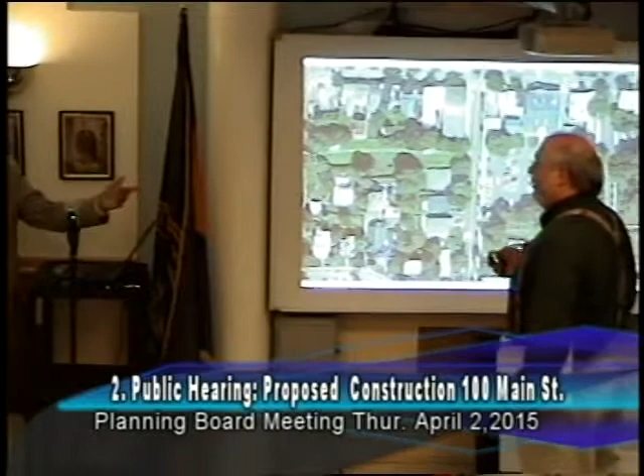Just for memory, this is where we started, with the low-pitched roof on the front. We had parking underneath, two stories, and a low-pitched roof with no usable attic space. People felt this looked wrong, though it's actually very similar to the roof on the front building and the other buildings.

We went to the larger pitch with dormers in response to a request to make it a bit more interesting. This is how we evolved it out.

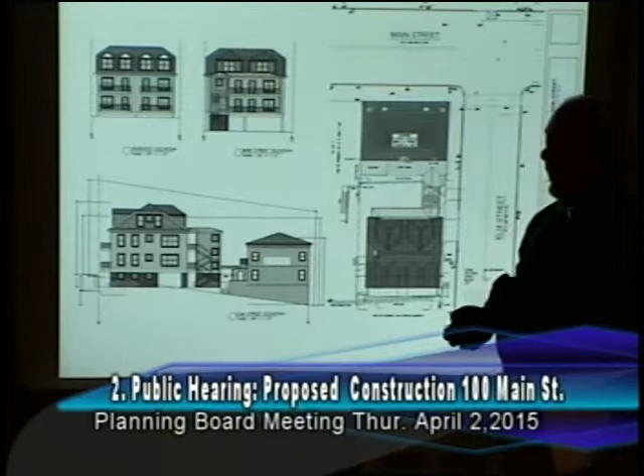I think you want to be careful, since you have the power to say you like this better, not to just ask how do we make this as compliant with the code as possible. Under 352E, you have the ability to modify that because you think it's in the interest of good planning. You could say you prefer the feeling that this breaks the scale down, and you don't want to see it all unified into one structure. But that's a decision you guys will make, and it won't be tonight.

These were just follow-ups to that. Now, what we've done here is a different site plan than before. We've moved this building further away from the aqueduct, so we have 10 feet of separation to the aqueduct. We have not enclosed the parking.

If we wanted 100% compliance with code, we would build a wall in front of the aqueduct's retaining wall, which we do not recommend doing, and cover that, at which point we'd be fully compliant with the positioning of the parking. That wall could be 9 feet high, fully enclosing the cars beneath it.

What we got to with 6668 was the idea that we would locate the parking adjacent to the aqueduct but move the building back, and that's how that project was approved. When we went to the Architectural Review Board, they insisted that we enclose the parking, so that's what was eventually done.

So the parking, we've increased the distance and moved the building over. We have 10 feet from the property line to the parking spaces. Just to clarify where the aqueduct is—right here, along this line.

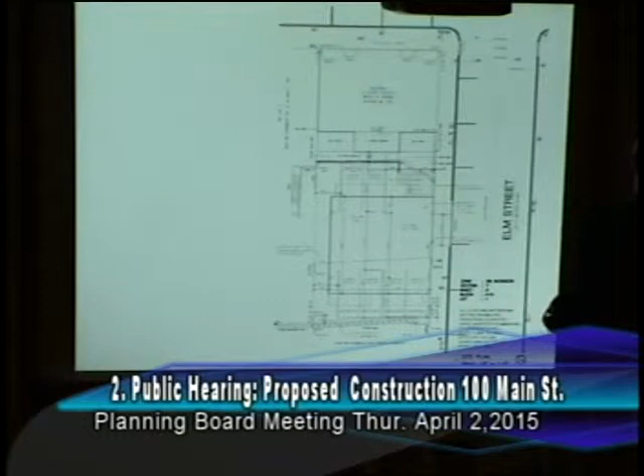We could still have a courtyard area here and a courtyard area back behind to make the connection across, so you'd have a conditioned space connecting the buildings. You'd be able to walk from one building to the other without going outside.

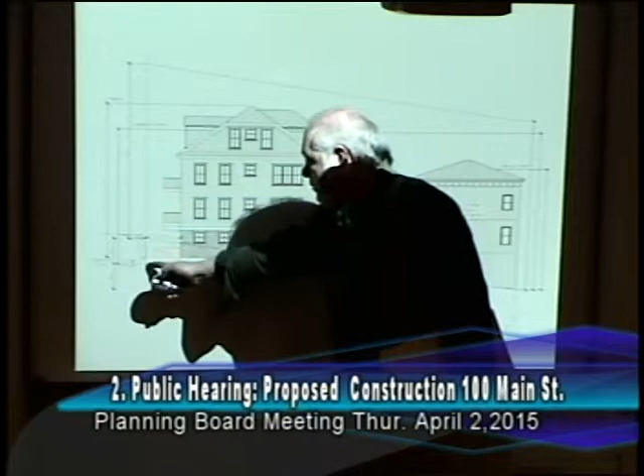With that change, here's the aqueduct wall, here's where you'd see the parking, this is the parking level, the first floor and second floor, this is the attic space. When we get to the SketchUp, we can show you that without the attic space being habitable, which makes a significant difference in the height. Although this is the 50-foot line, in fact here we're still not exceeding 50 feet. So the numbers on this all work, though I understand numbers aren't what's going to drive anyone's opinion.

But that doesn't mean people don't feel it's too tall. So there's a way to make this less by eliminating the attic, and you still get 4 good units. Here, this was where we originally proposed putting the 4th floor on the front building, so you'd have the retail, and 1, 2, and 3 floors of residential. That would make it comply, if they're separate structures, and it would eliminate one of the variances that would be necessary.

We would still need a variance for the interpretation. I don't agree with it, but I'll respect it. The interpretation is that you can only have one primary building, and if you have 2 buildings on the property, there's a primary and an accessory, and you cannot have residential units in an accessory structure. So the only way to have two buildings on a site... although we have several conditions in the downtown that have that, it was also pointed out to me yesterday that those were built 100 years ago, so they weren't under our current zoning. I wasn't on the board then.

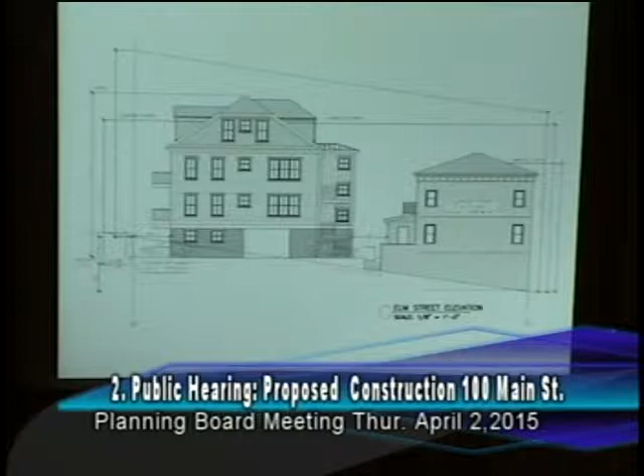So that takes us up through all this stuff. This goes through all the photos. I don't know if you need any of the photos.

Let me ask you, whether the top floor on the back building you propose, is that habitable space, an attic residence? Yes, it'll be a residence. It would be the second floor of the units, and the two units on the second floor would have a staircase with two rooms under the attic in the dormers, so the bedroom areas would be there. So you'd have nicer units, but you don't need that to have those be units. You'd still have an 860 square foot unit without using that attic.

That attic would lower it probably 10 feet if you take that out? It's not quite that, it probably lowers it about 6 feet. But it's more than just the 6 feet, it's not just the number. It completely changes the way the roof looks, it's a much flatter roof. You don't have the dormers, you're not bringing that energy to it.

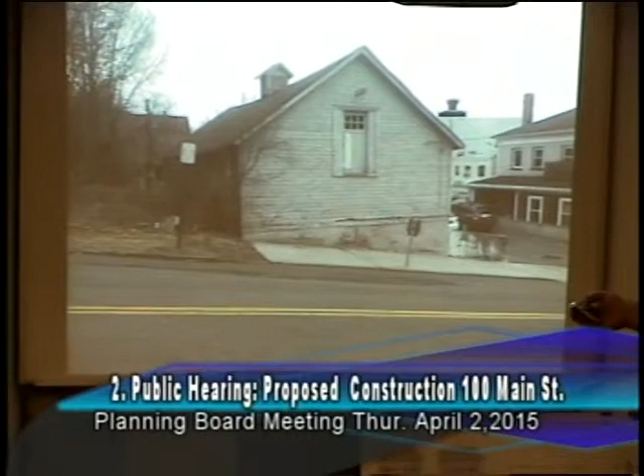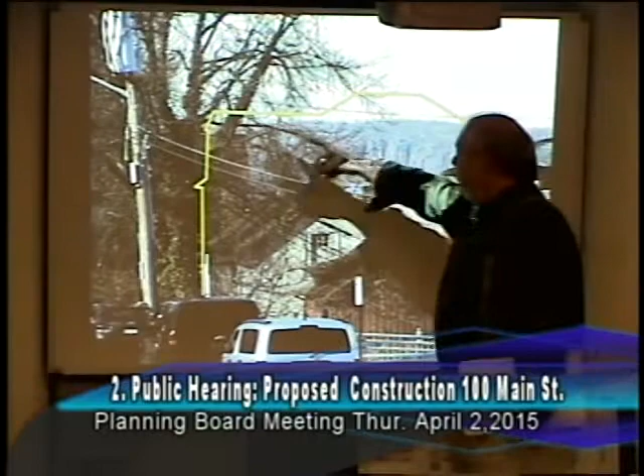So it's a different look, but I think it'll be better to look at that in the SketchUp. Steve was nice enough to help provide a kind of frame for what he was projecting, because views are going to come up in this, with the natural resources and scenic review. So we took this and showed how the building we're proposing actually fits within that frame. Steve's fairly accurate with what the height would be. What you're doing is you'd be losing this view. The only challenge with this photo is that it has to be a telephoto lens, and you're standing pretty high unless you're over on Oak Street, but it's a great view.

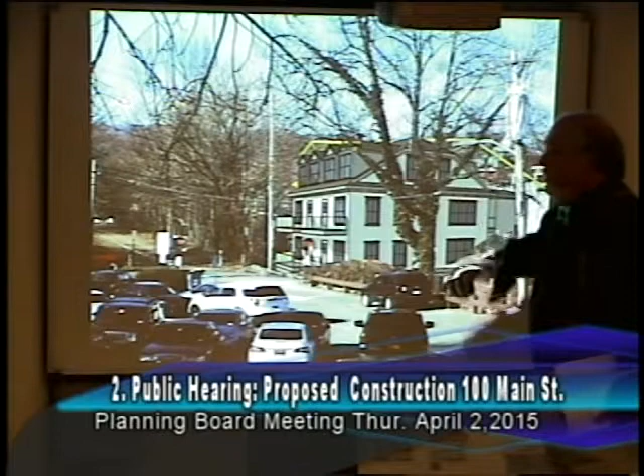We did the same with this one, where that fits in. We don't go as far over as it was projected, but I don't think that really makes a difference. And these are, of course, with this floor. If you imagine not having the attic and the dormers, and that the height is here, it's much more consistent with the two-family houses up the street on Elm Street. But I don't know, is there any interest here in going into any of the photos?

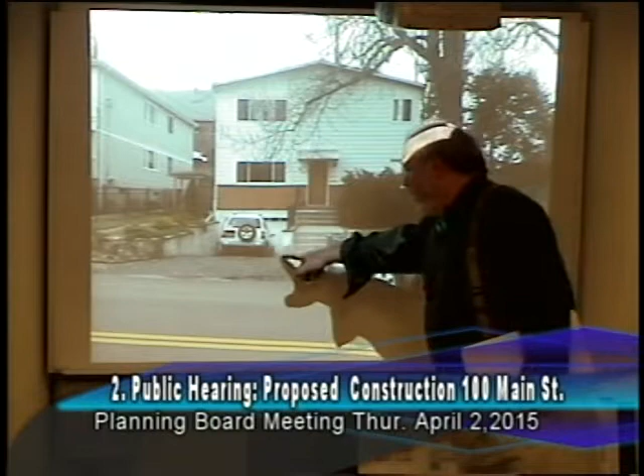You guys know this village better than I do. I believe we do. Yeah, these are the houses up the street, 2 stories. They're not quite as tall because you get the ramp down, but the difference in height is how much of a difference that is from getting the ramp down.

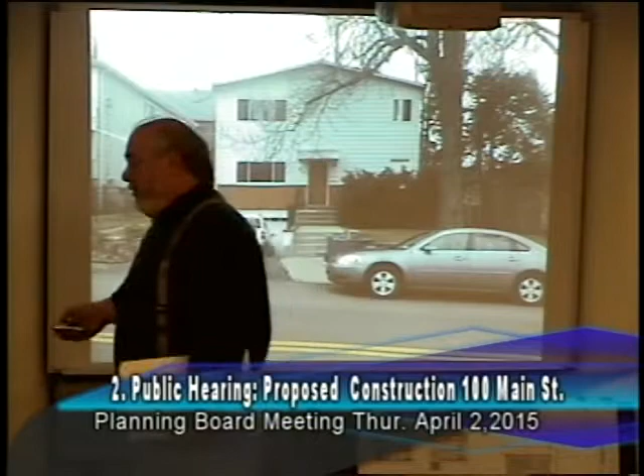So these are probably 2 to 3 feet shorter than what that is, but again, fully compliant, and these are not in the DB zoning district.

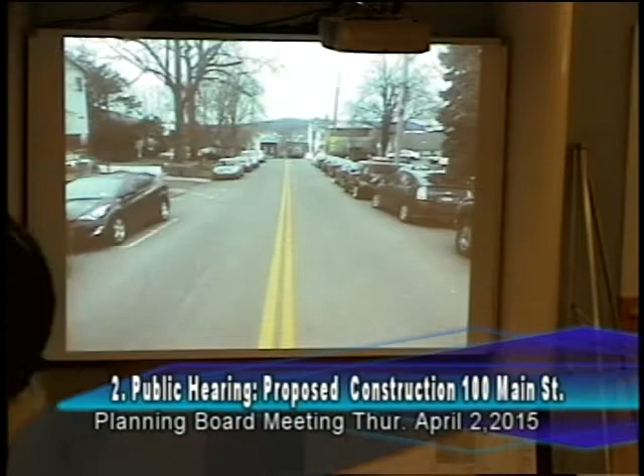Hey, how many spaces are proposed in these plans? Parking, yeah, we propose 6. And how many would be needed? If we have the plan that we have now with the 2 in the front and 4 in the back, 6 units. Okay, and what if you add a unit?

Not including street parking. There's no requirement for the stores for their parking. We're required 1 parking space per residential unit. So if we have 6 units, we need 6 parking spaces. We've provided 6 parking spaces.

These are all - isn't it one per additional bedroom? No, that's only if you're not a mixed-use building. If you're a mixed-use building, it's 1 space. I'll defer to when Brian comes back. Unless - are you up on that? So you are mixed-use, but the back building's not. So you have 6 total residential units and plus. 6 parking spots. So let me look at it, hold on.

Mixed-use dwelling requires one space per dwelling unit, that would be your 6. And you're interpreting you don't need to add anything for the retail space? No, that's existing space, and the code specifically stipulates that existing retail space does not require parking. At this point we wouldn't be touching the front building.

Gotcha. What size, how many bedrooms in those back units? They would all be set up as either a small 2 or a generous 1. What's the difference in a small 2 and a generous 1? If I've got 20 feet of width to the unit, that's called generous - I can put 2 bedrooms side by side on the back. So you can get a 2-bedroom unit to fit in that.

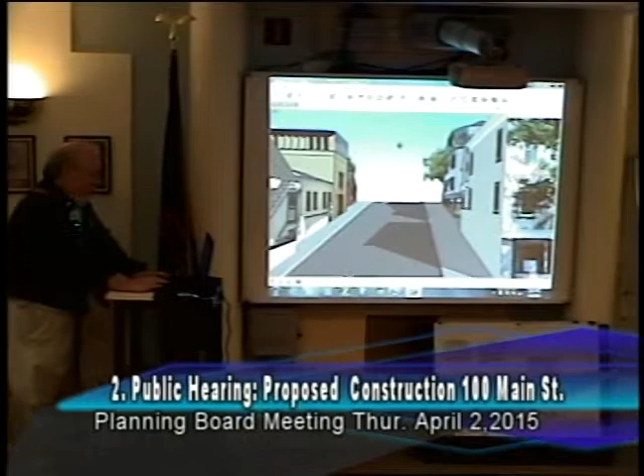Okay, this is the scheme with the attic space, which I'm just going to kind of spin you around quickly on it. This basically shows how the space feels between the buildings, where you've got the ability to see through - you don't feel like it's a solid wall coming across, which I think has some positives to it. But that's an opinion, and other people could say they feel differently.

Just so you're aware of it, we're showing shadows on all of these. This is June at 4 p.m., so this is the solstice in June. I've also got the December and the equinox, so we can compare what those are. I did 4 o'clock for all of them because that was the greatest shadow that we put on the street. Okay, so if we look at this, and if I figure out how to move this thing down.

Okay, let me show this - it's going to change position. This is the lower pitched roof. If we did this, so we did not have the attic space above, you can tell that it takes a lot of height out of the appearance of the building. That attic space with the dormers definitely makes it look like a taller building.

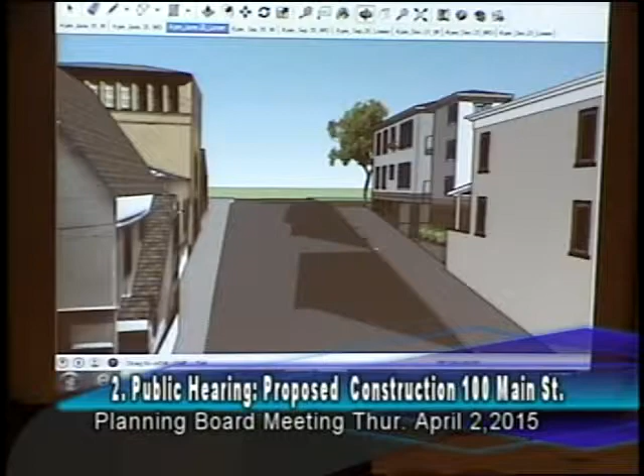I think it's a nicer building, but again, that's my opinion. You don't have to have that to make it work, and it's not a matter of the board giving anything special because that is a totally legal space to have. In fact, it doesn't have to be an attic space - it could simply be a third floor on the building.

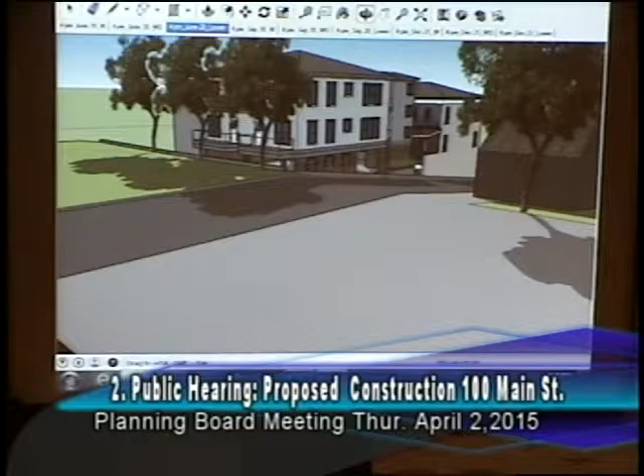So this is looking at that one. I don't know if there's any value to it, but I might as well show it. This is without having anything there other than the barn structure. The reason that might be worth looking at is if I'm down on the aqueduct level, I can see that the barn structure itself right now makes any view towards the river unviable.

The main difference between what's there now and if we build something is we're going to affect more the sky view - the height will block more of the sky, and there are two views that'll actually be directly affected to a small degree. It's not dramatic, but it's still affected.

One is from the Historical Society, when you're standing on the porch and looking. Right now you see the aqueduct, the river, and the Palisades with this building down below you. You would now see that roof line coming up, and it clips a small view between two buildings across the street - you would lose that view. We'll document that for the next meeting so you can see exactly what it is.

The other one that gets affected the same way is Oak Street. If you're going up Oak Street, by the time you get towards the back of the parking lot, with the rise you've got a very nice view there. Right now you don't notice this building at all, but with this built, you would see it as part of the panoramic view. It doesn't block your view of the Palisades or the Hudson, but it just becomes visible - it becomes a component in the streetscape, so to speak.

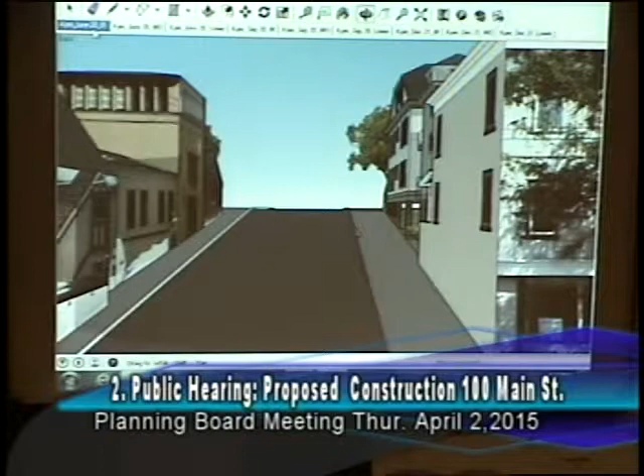It doesn't come up as high if you're doing the lower roof, so that's probably the biggest difference you'd get in how that works. As I noted, in June at that time of day, by around 4 o'clock you're getting shadows on that side of the street, but you're also getting continuous shadow on the west side of Main Street at that point, and I think we can all handle that pretty well.

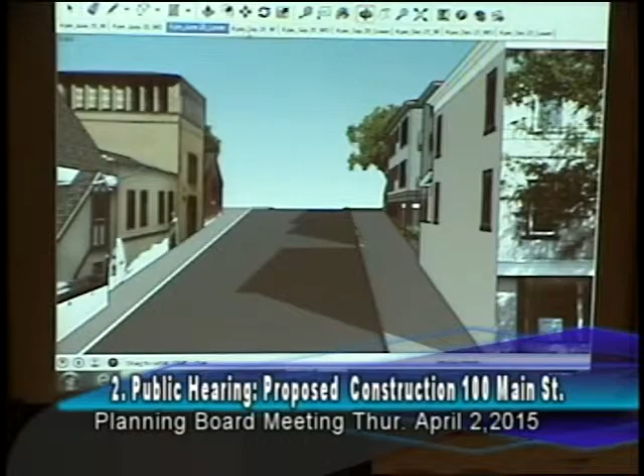I don't know, any other questions? Have you looked at bringing the eave down to the next floor so that it appears as an attic space? That starts to suggest a different roof form that I'm not going to touch - the way I'd do that is make it a mansard.

And right now, I think we're being mansarded out. So I think it would be actually a very good way to handle it, but I didn't feel comfortable proposing getting another one. You've already got two. Actually, though, we eliminated the mansard and everything on Main Street at 66, 68, but several people are reacting to the mansard roof.

Well, why does that necessitate a mansard? It doesn't necessitate a mansard, but if you look at that context, like all the buildings across the street, up at Zion, what they've done is they've put a mansard specifically on top of the building for that reason, so you get a usable top floor.

And you haven't lost, if I moved the existing attic down, I could do 2 units at that point, but I don't think this works with 2 units. I think we started with 12 and we're down to 6. 12 units originally. Yeah.

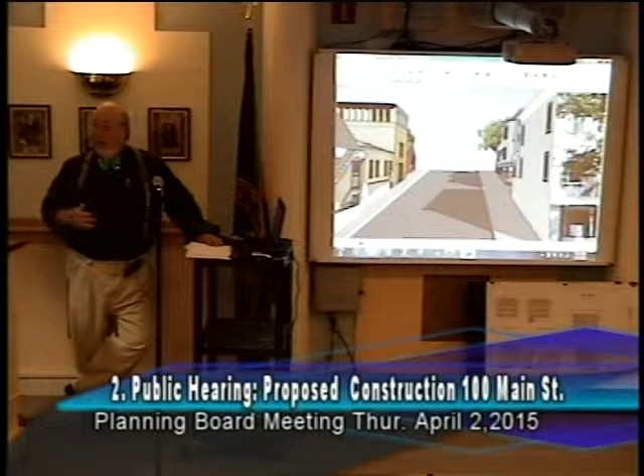So we've cut the density of the project in half, although maybe I'm the only one in the wilderness saying this, I think the goal should be getting more residential units in the downtown, but I'm not gonna fight that. I've cut it from 12 to 6.

And I think my understanding when you came last time was not that we told you to make it more dynamic. I thought we were saying make it, either utilize the barn, make something of the barn. If you can utilize it, take something from the barn.

Which reminds me, what I think we need, and I'd like to do it on the 18th, so it's before the 20th, I think we need a site walk. I think we should go out and we should look at it, and I don't want to be saying what the barn is or isn't or anything else. I'd like everybody else to have a firsthand experience of it and decide what they would like.

I made an offer at the last meeting, which I stand by, I'm willing to do it. But so far, no one has expressed an interest in that, so.

There's been a lot of discussion written about the barn, of what the age of it is, what the status of it is, what the condition of it is. I'm hearing many, many, many, many stories.

I started a really awkward argument between two people who are 83 years old on the street. We got into a conversation, and one of the people, both of whom grew up in Dobbs, have lived in Dobbs their whole life, one is basically saying, I don't remember anything ever changing on that in the 40s, and the other person's saying, don't you remember when they took that building down, they used the materials, they rebuilt, they built the new thing when they opened that boat place. So one person remembers it, the other person doesn't.

I'm still trying to find what it is. I've heard both. Looking at the construction of the building and having had some experience, having renovated actually a number of barns and moved barns and converted them into residential use, I would not be trying to do that with this structure. There's nothing intrinsic about it that says, wow, this would be great.

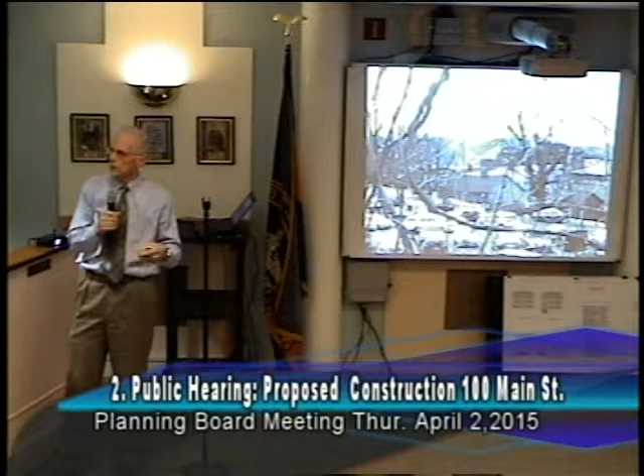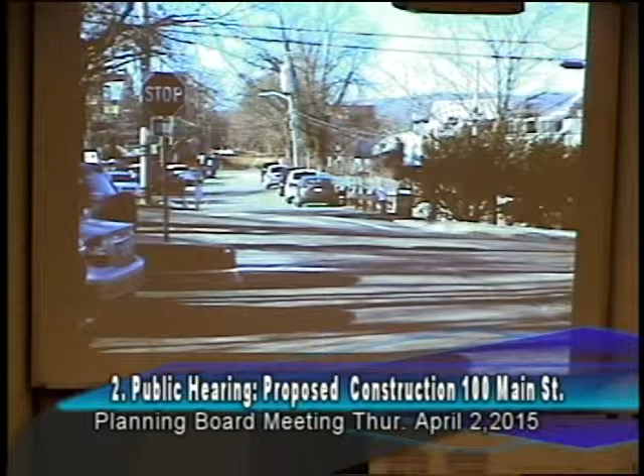So Patty's right, I was walking up Oak Street, trying to stay on public ways, which is what we did for the LWRP view platforms, looking at views from public spaces and views of the Palisades and the river. We are a ferry-related place. This is from Oak Street, and this one's from further up in the parking lot behind Sam's. I think the view issue has to be thought about in continuity.

Movies are frames of things that build up. Views in the village and along the aqueduct, each individual view may not be the Ansel Adams postcard view, but they add up, because your eyes and your visual memory are smarter than you are. They register these views you pick up as you walk down the aqueduct.

You're seeing these little slivers, and they add up. So it could be death by a thousand cuts if we start treating each one by a standard that says it's either the greatest view ever, or it's something that's in play.

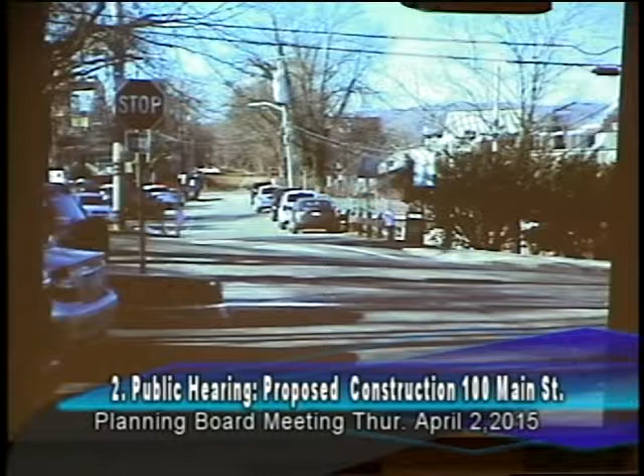So there's a view here. You can start to see the Palisades view developing. And as you walk into the parking lot, at eye level, you can see it registering.

This is what happens when you take a picture of a fantastic view in the landscape, like a canyon, and then get home and you don't see the canyon anymore. You saw it when you were there because your eye projects you into views. So the telephoto isn't lying, it's creating something you experienced yourself. Your brain brings you into those views. So this view is actually there, I think, even though it's a telephoto lens.

I don't mean to interrupt, but I'm interrupting. I should have prefaced that this is not a public hearing, so even though we're making comments, it's really directed to us for our own thinking, and to the applicant. From the point of view of a record for a public hearing, that will come later when it's called. People making presentations, this is just a preliminary forum, it doesn't go on forever. This is a very short PowerPoint. This is short? This is helpful too, I think. Patty, you didn't have to do that. I respect Steve, he knows that.

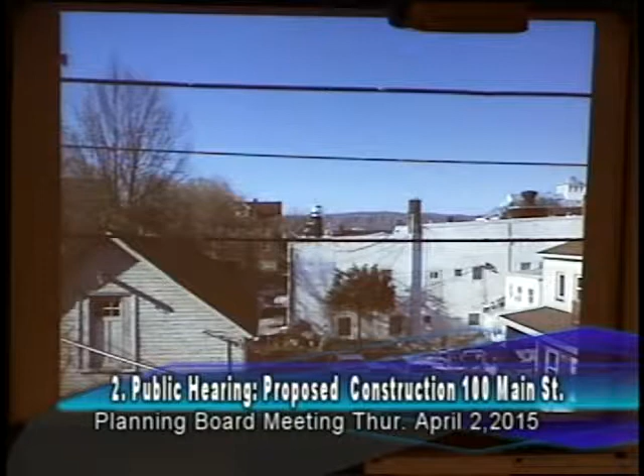So there is a view that registers, sorry if I'm in your way here, a view that registers from that location that is gone. There's a view from Oak Street that is blocked, a significant view of the river. And then I can't avoid this, the view from my top floor, which we invested in and enjoy, particularly that little glimpse of the Palisades.

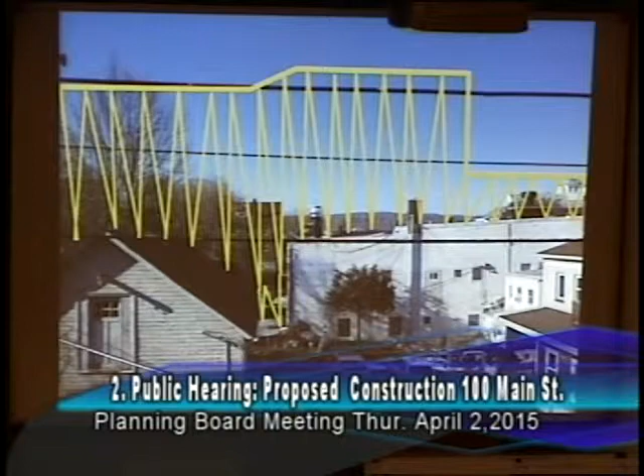So the winter sun angle thing is, I think it's also about, that's a slippery place. We've watched a bunch of people fall down, not on our sidewalk, on that sidewalk across the street. We're pretty careful, I mean maybe somebody did when I wasn't looking. Well, we get very little snow now, so we don't have a problem. Exactly, now with global warming we're really in good shape.

But there is, obviously, shadow analyses are certainly important in site planning. And that street, as a slope street, the winter shade, this is November 21st through January 21st at midday, so this is the highest sun angle. Other sun angles are lower in that time of year.

And this is my projection of the height of the most recent application that I actually had my hands on. So I'm going to switch to historicity and just quickly move through this.

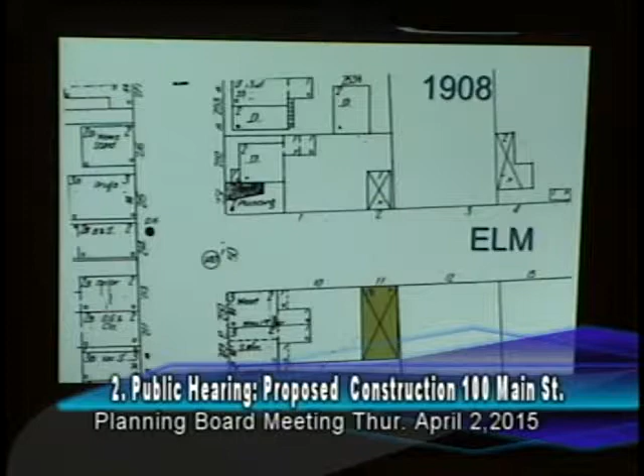This is a 1908 map where pretty much what indicates the shape of the barn that's there. I believe that the lumber is pre-1902 lumber, just dimensionally. Doesn't look like it was reused, but again, all my sensibilities and intuitions are that this is from the 1880s, 1890s.

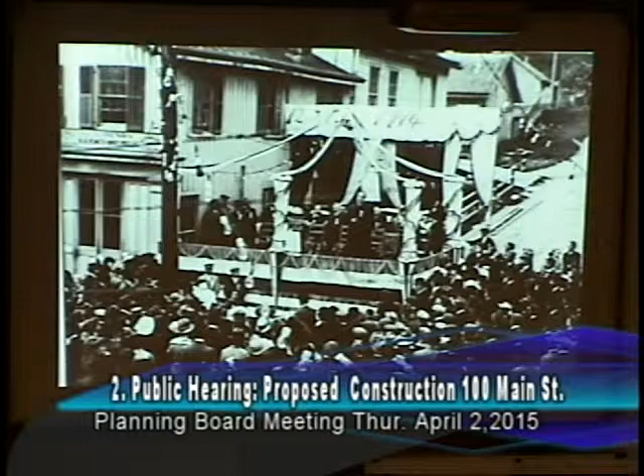And my collection of buildings, I think, is resonant of that era. And I think there are other companions that keep that memory, that collection of memories, alive. And I think that's a great thing. I think it's really an important thing.

So what I see is, in the vision plan, John Shapiro and the Land Use Committee said really the entire downtown area should be a historic district because there are so many 100-plus-year-old buildings. And there would obviously be non-contributing and contributing buildings, and some judicious way of allowing and promoting change. At the core of that is our National Historic Landmark that threads its way from Croton Dam to the High Bridge and connects hundreds of historic sites along the way, including a whole bunch in Dobbs Ferry.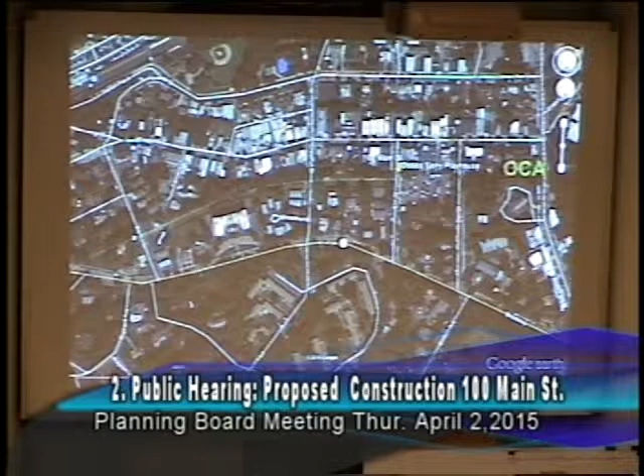So you've got the old Croton Aqueduct, which connects - I've left off some things on this - the Zion Church, South Pres, the post office, which is a National Register building. It's not late 19th century, but the Mead House, our building at 100 Main Street, 12 Chestnut, the Gagliardi House, which is this wonderful kind of oddball thing right on the aqueduct, the Keeper's Barn. I left off Summerfield Methodist Church and the parsonage, which are really also from that era, and the Keeper's Barn, which is another wood frame relative from the last half of the 19th century, the Keeper's House, and the Carriage House on Hatch Terrace.

And so I think that there's this argument about collective memory and the memory that remains in artifacts that's not easily dismissed. Again, more of this obviously on the public record in a public hearing, but that's my brief.

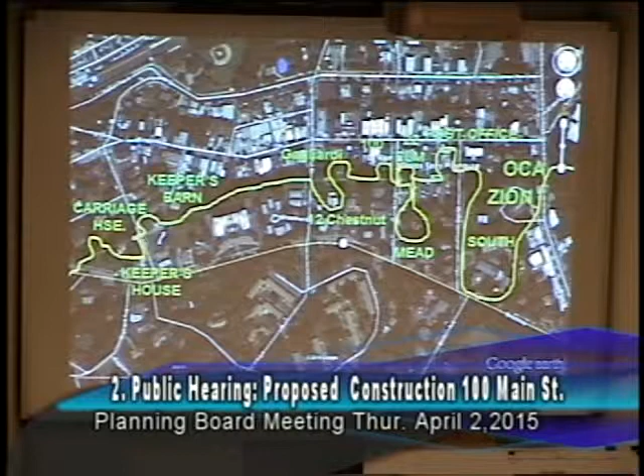I think there are some zoning-related issues that need to be addressed and a set of other qualitative ones. I think that a lot of what's said, and this is a lot of the material that came in discussion on the board that I've been involved in for years, is that it may not be a landmark issue of a federal or state level, but there are many things in the village of local historic significance. And in some manner the board in the past, and should be in the future, should be concerned about these, if we can maintain them.

The issue, of course, is a series of who owns it, what the economics are, and the whole issue about the barn - you can talk about that till we're blue in the face, because whether the nail is this way or that way, and whether it was this year or that year, was it dressed, was it finished lumber - these are issues that can be discussed by somebody of expert status.

Okay, keeping in mind this is not a public hearing, just advice, suggestions. Anyone else wish to speak? Please, if you can state your name and address.

Good evening, Annalisa Corrales, 12 Livingston Avenue. I recognize this is not a public hearing. I do have some suggestions for the applicant. First of all, to listen very carefully to Mr. Tilley's presentation, but also, sorry, okay.

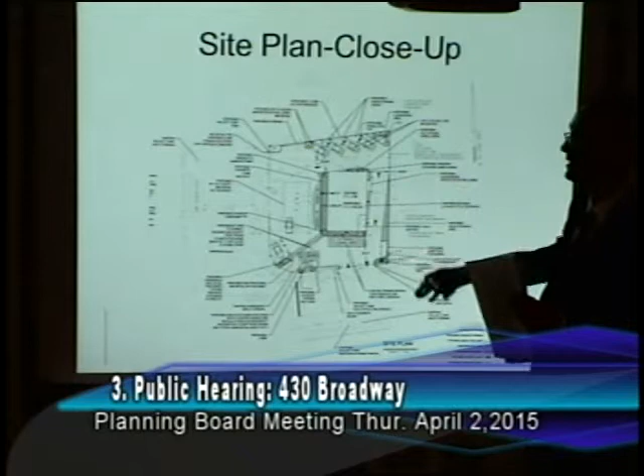Certainly, and the next slide is a blow-up of the site plan. As I understood it and was relayed to me earlier today, the issue was that the parking is proposed along the rear property line, and there's a 10-foot setback requirement. The site layout doesn't really allow us to create parking in any other location, except immediately adjacent to the building, which on the prior proposal from over a year ago, the planning board and the board of trustees were not in favor of. So this is really the only location where we could propose parking. I don't know if there's any comments or questions or discussion. Well, does that comply, Brian?

Well, this is the issue we were just speaking about. There would need to be a 10-foot setback under chapter 300. That could be waived if it meets your thought process of how you want this site to work.

I think there's an issue you need to speak on. Dr. Grealy's here and can discuss whether he believes this parking layout is better than any other layout, but you can consider that and waive it if you deem appropriate. If not, then we need a variance. The abutting property here is the diner property.

Yes, you need to have a 10-foot setback on that side. The 10-foot would be from here, is that right? Yes sir, and it's approximately 3 feet the way it's set up at the moment, so there'd be about a 7-foot requirement for a variance. And I think there was a discussion at some point of having the parking against the building.

That's correct, along the back edge. No, that was rejected by the Board of Trustees. But even on the north side of the building, that didn't work either—you wouldn't be able to get enough spaces there, and it would create issues if you were going to do angled spaces in that direction, since you'd want to send the traffic flow around, which we don't want. Based on the last round of comments, we changed the traffic flow to be counterclockwise.

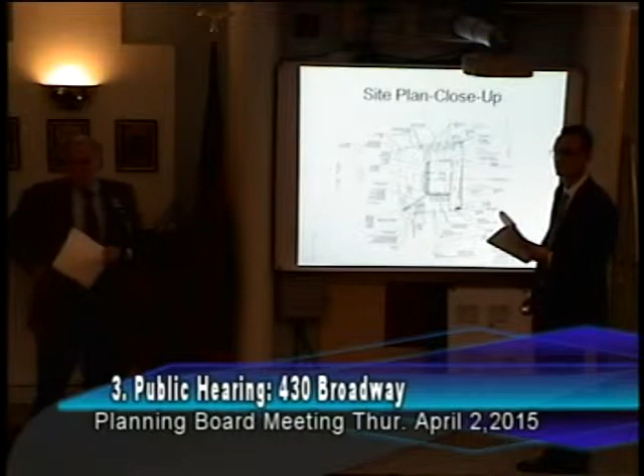Quick question: is the car parking space on the right 10 feet from that side yard, or that property line? This one? Yes, the last one. So is the variance only on one side or both? The code actually reads that you need to be 10 feet from any rear or side yard setback, so you have a double variance requirement, as well as all of these.

But is that 10 feet already? Do you have 10 feet there, to this property line? Yes. No, probably not. No, they don't.

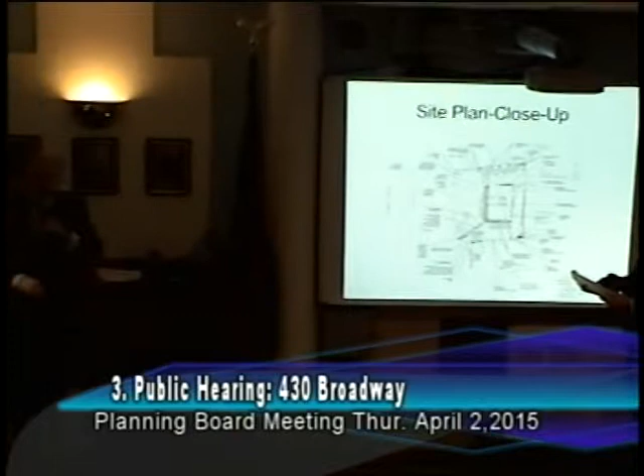Okay Phil, you're on. Good evening, Mr. Chairman, members of the board, members of the public. Philip Grealy with Maser Consulting. We were asked to review the traffic study as well as to provide comments on the parking and circulation. This application was originally submitted, and there were modifications made based on the previous reviews.

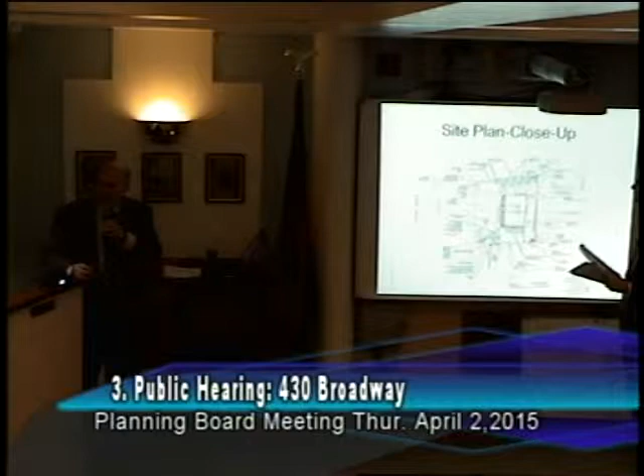The most recent round of reviews on this particular project included 3 memos or letters from our office. The first one dated back in December of 2014. In that letter we focused on 3 items. One was, at the time, there was no traffic study done. Number 2 was some general comments relative to the site plan in terms of circulation, which the applicant has just talked about, making it one-way counterclockwise, which the plan now has. Number 3 was our concerns relative to traffic flow on Ashford Avenue due to the proximity to the traffic signal.

The applicant made a resubmission and basically made the modifications in terms of the circulation. They indicated that they needed to have two-way access, both entry and exit, on Ashford Avenue. However, we were concerned that by having traffic exit here, because traffic queues up from the light across the driveway, it could be problematic. The applicant has stated in their submission that they would be willing to live with a condition of approval that if there was a problem, they would modify it to become right turn entry only.

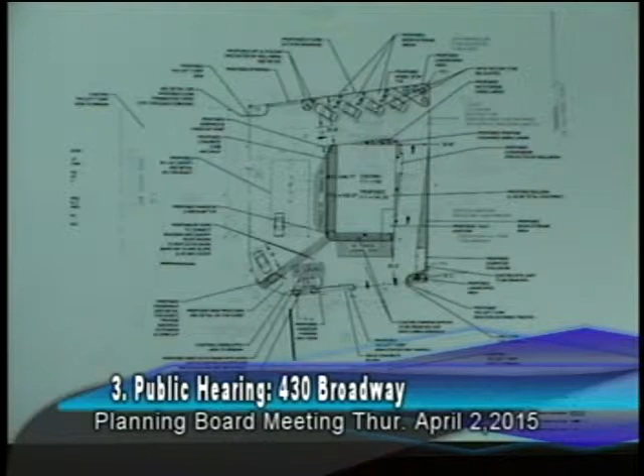I think it would be good to get that input early, but if the applicant feels he wants to leave that as a condition of approval, that's their prerogative. We're in agreement with the village engineer that input early is better than late.

I have a quick question. I remember at one point, pertaining to a gas station, there was a requirement for 150 feet for the driveway from the intersection. Does this satisfy that dimension? This doesn't satisfy that dimension, but it's an existing driveway, and that's one of the reasons we were suggesting to make it entry only, to get that distance, because you don't want the influence close to the signal.

My next question goes to planning: if the change of use, originally a gas station, now it's a change of use, does that grandfathering still carry over? They've had a convenience store, so I don't think we'd call it a change of use. You're saying it's tied in with the gas station? It's been there for quite a time, so I think the gas station use is grandfathered, and there's been a convenience store there for years and years.

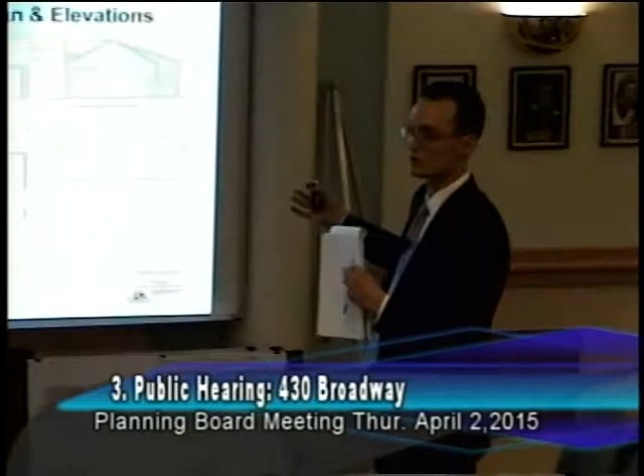So these are proposed floor plan and the elevations of the new structure, the renovated structure, with the removed bay at the northerly end.

This is similar to where the applicant left off with the Board of Architectural Review on the last go-around, minus the bay.

And this is one rendering with a flat roof option on the canopy. What is the thickness of that? What is the height? 36 inches, 3 feet. It does look like more than that. In order to fit a fire suppression system in there, I think you need a certain width to it.

And then a different option is with a mansard roof, which I heard earlier conversation on, no more mansard, so we can just delete that slide if that's not something we've gotten input on from the Board of Architectural Review yet. On the last application, this is kind of where we left off at the board before the application ultimately got denied at the Board of Trustees.

Is this a very important item? The canopy? Yes, you're fighting pretty hard for this. It's a fairly standard modern amenity on most redone stations nowadays. It's done on highways, I see it all over the place.

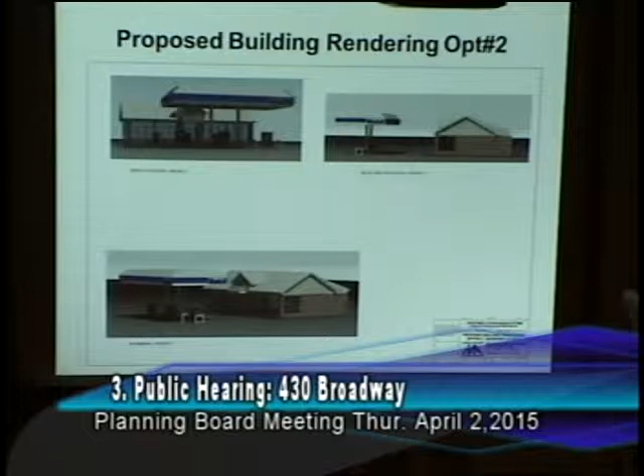Okay. Yeah. Well, I just had a thought before the meeting, because I drove by it the other day, and I asked Marcus to use Google Earth and go to Google Street View in Irvington. So this is one of the corners you could argue is a 100% corner in Irvington. It's that gas station right there. And they have a canopy, but it is quite thin. When I drove by it last time, I noticed it's actually quite thin.

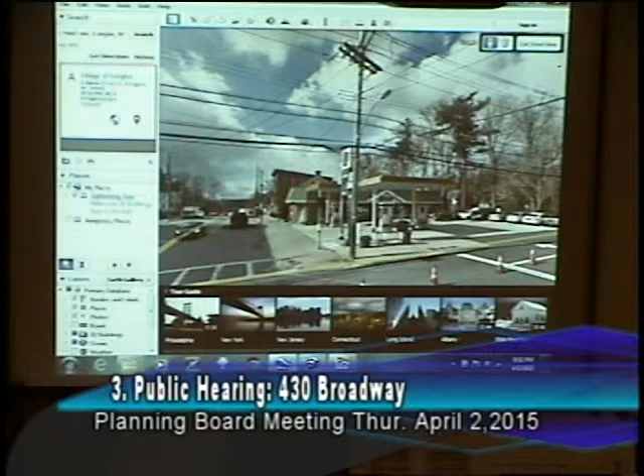Like a couple feet? I don't know if it's even 2 feet. And I guess, personally, well the mansard roof, of course, if it's a gas station it should look like a gas station, but the mansard roof, or any kind of roof, I think is ridiculous in my opinion, but the Architecture and Historic Review Board will tell you what they think. But if there is going to be a canopy, there's got to be a way to do one that is thin.

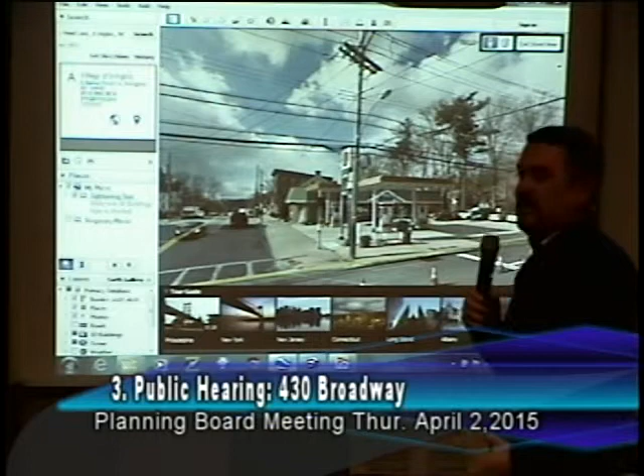Scott Parker, with the owner. If you look at this picture, you can see right here, there's a little red thing. That's the fire suppression. The fire suppression canisters have to be upright, and they go on top of the canopy. The site we're talking about is at kind of the bottom of the hill. If you're coming from the other side of Ashford, that would be very visible on top of the canopy.

Is this why you're making it thicker, making it higher? Yeah, I mean it hides everything. Typically that's why that depth is there. Structurally, obviously we can get down this far, but then we've got to figure out how to hide things up there that you don't want to see.

So if there were a couple boxes on top that enclosed the fire suppression, could that work? We've done that. Certainly, instead of having 3 feet, it could be 1.5 feet.

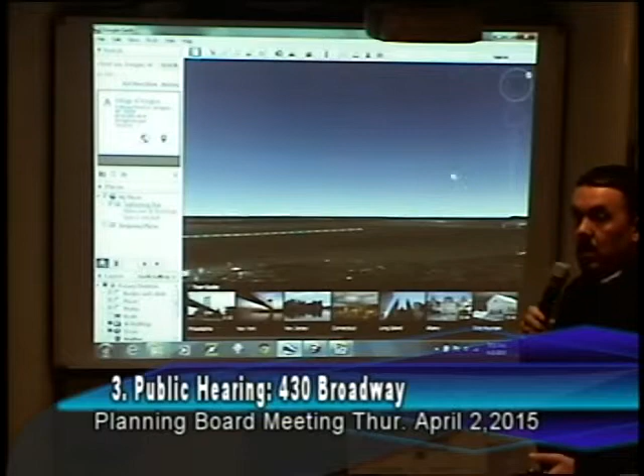If you go, which way am I going? Oh, I'm sorry. When you come down Ashford, isn't it blocked by Walgreens? True, yeah, but no, the other side. He's talking about when you come from Broadway. This side, south is this, and you're on this higher canopy road.

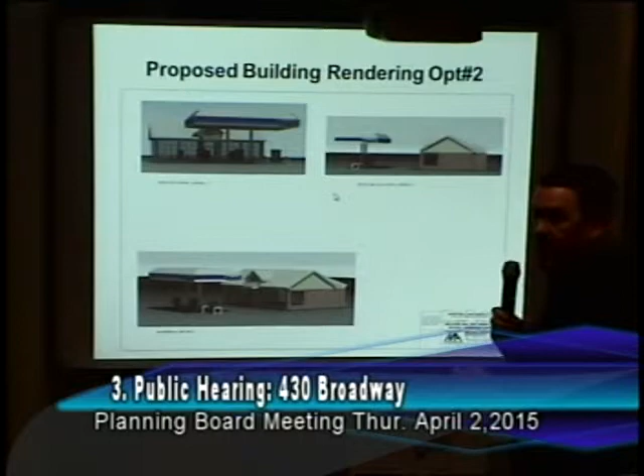Is it lit? No, we're not proposing to light it, no lighting, so that'll be very clear. No lighting. This is an example of one that we recently built, just so you can see that.

But that one you said earlier could be 3 feet. That is 3 feet, plus a roof. But you could make it narrower if there was a way to enclose those tanks.

Okay, I thought we had one more picture that showed a view from above. We took a picture from up here on this hill, and you can't see the canisters on there, the fire suppression canisters. But you do see a 3 foot thick one. And again, would it bother you to make it 1.5 feet if you didn't mind seeing the cans? No, but you put an enclosure around them, a box.

It's fine. I think it'd be good to get a better idea of what we actually see in terms of these canisters, because I know the gas station, the Getty, caddy corner, right? They don't have a canopy, they have a fire suppression system, so they're not hiding it at all. Right, and I guess you see those little nozzle things. Sure, and the canisters are actually mounted on the thing. To me, it looks like it's just part of the gas station equipment. So I guess I don't understand, I feel like the whole fire suppression thing here has become overblown and overcovered.

I can't figure out why... on those little stems, those are fire suppression nozzles. Right, but the thickness - the whole business of hiding the fire suppression system, I don't quite get.

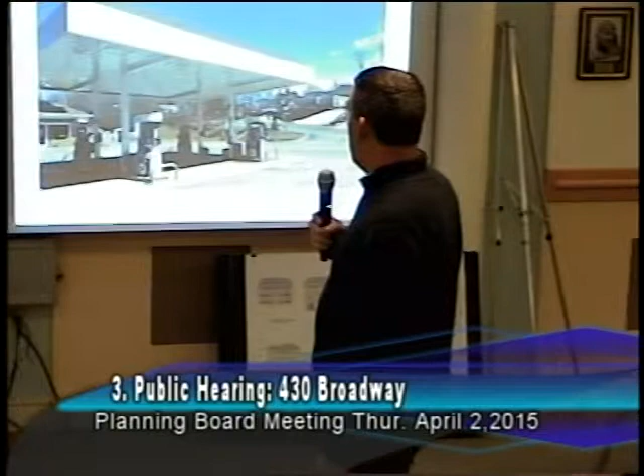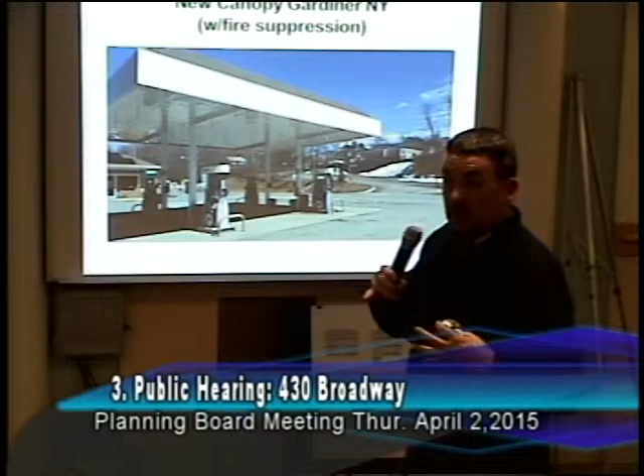Let me ask a question - those stems are far away from the supporting poles of this canopy. I'm wondering if there's some new code, or could you put all the canisters on the poles? We could hang the canisters on the poles, same way it's done with the red cylinders. So there's no law change requiring that - instead of having it hidden up top, you'd just see it here at 5 feet. That's all.

Paint them with stripes - they'll think it's a barber shop. You might be onto something about the barbershop. I don't go to one.

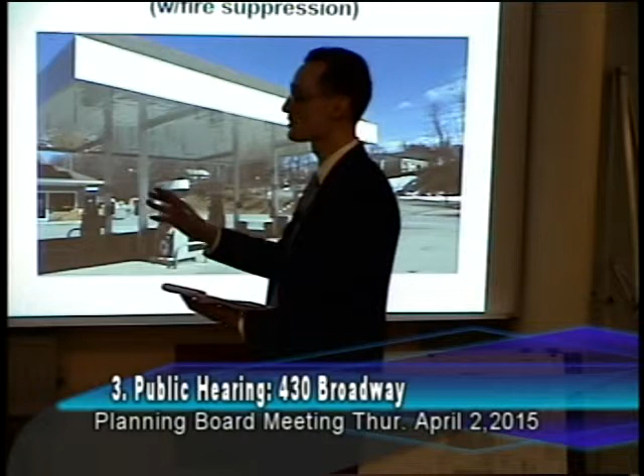We also look forward to those two letters, one from State DOT and one from County DPW. Do you have to take comments today? Yeah, if there's any public comment - today is a public hearing.

Anybody wish to speak? Anybody ride a bicycle? What do you care about gas for?

Can you pull up the drawing of the site plan again? Could you use the microphone, state your name and address, and state who you are? Rob Barron, I'm from 10 Cricket Lane.

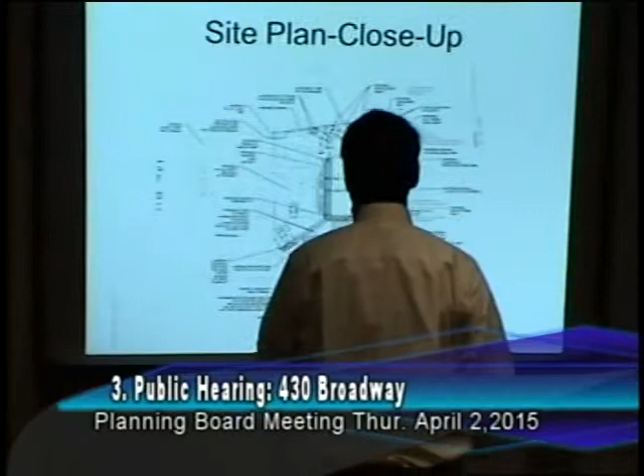My big concern is - I have a couple of concerns. We always talk about protecting the aqueduct as an important mode of transportation for the village, but this is actually one of the most important sidewalks in the village. Everybody knows people are going to school, going to town. It's also a significant transfer point for our bus system - we're trying to get Mercy College students to use transit. They're getting off the number 6 bus, transferring to the number 1 bus going north, then going to Mercy College.

So the big concern I have is that these driveways, with now double the number of cars, are going to create significant hazards on this crosswalk to people walking, including our kids going to and from school - this is sort of peak time.

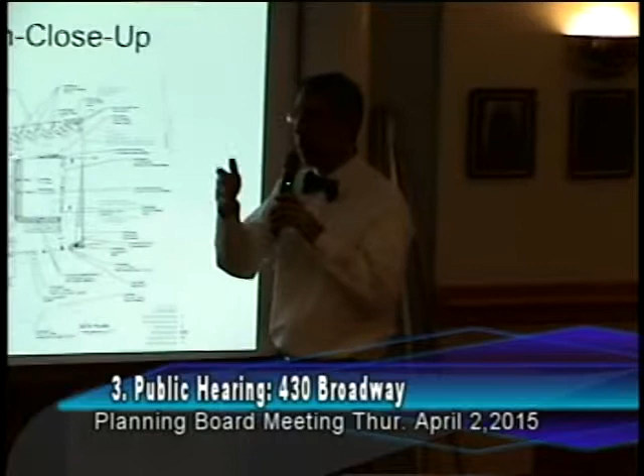I get the Dunkin' Donuts thing - people are like rabid for this coffee, I kid you not. I've been at other spots in town, over near Scaramella's, and you can't believe the cars going in and out of there. So that's my big concern - here we are trying to create a vision plan calling for more, trying to encourage more pedestrian use.

As a bicyclist - I'm sorry, I'm saying it - as a bicyclist, when I make this turn and come along here, having the two driveways to navigate, where cars, even though they're not supposed to make a left turn, are looking left, looking right.

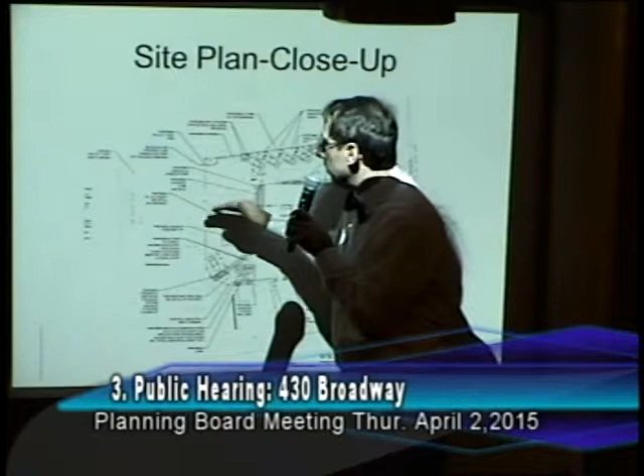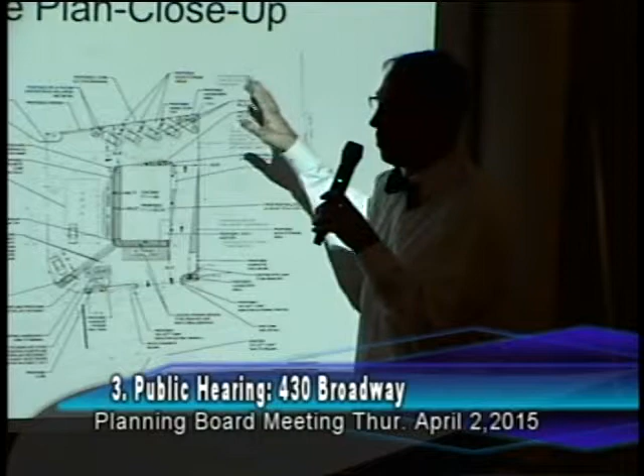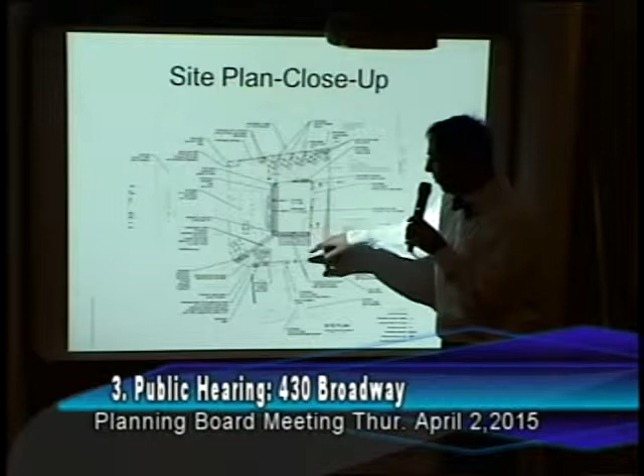It wasn't that offensive, Darius.

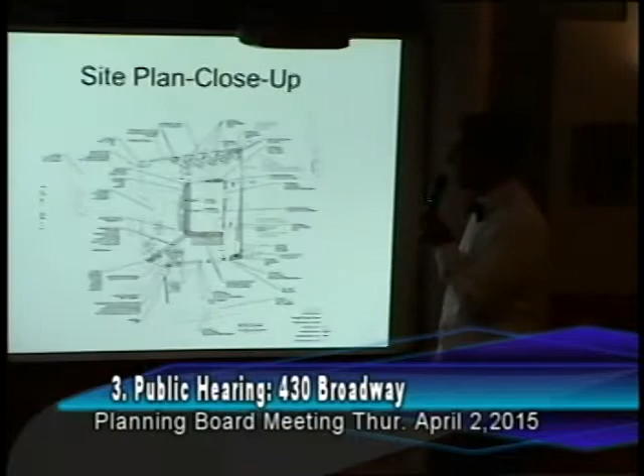I'd also like to see this crosswalk here be a raised crosswalk, so that when pedestrians are crossing, there's something to delineate it other than paint on the ground. I think that's it. I think this is a really scary thing for Dobbs Ferry from a pedestrian standpoint. Thank you.

Thank you. If you go into the past TV programs that showed this meeting, you may have heard some of these concerns before. Anyone else to speak tonight?

Please, you're going to become a regular, I see. You have to redo your name and address, make sure it's the same one. Yeah, no kidding. Annalisa Corrales, 12 Livingston Avenue.

Thanks for letting me speak again. I just have a question. Have they studied the traffic patterns of a Dunkin' Donuts? They talked about 20 to 30 cars at peak times, which sounds like a small number, but what will it be at peak times if there's a Dunkin' Donuts there? Similar to the person who spoke before me, I have major concerns, because it draws huge crowds. With that being the pathway to the middle school and the high school, so many kids crossing through, I have the exact same concerns. I'd love to see more data on the actual volume of traffic. It's already very taxed, very busy.

Excellent question. Phil, could you answer that please? Again, Philip Grealy. The applicant used the published data for this type of use, Dunkin' Donuts, Starbucks type traffic generation, in making the estimates. So when we talk about the increase in volume, it's based on the coffee shop Dunkin' Donuts as part of that square footage. The numbers would be less if it was just convenience, however the convenience store today does sell coffee, though I believe it's very limited. So if there was no Dunkin' Donuts but they expanded the convenience store, typically the coffee increases also. The specific study done included the 600 square feet as a standalone generation for the Dunkin' Donuts coffee shop category, based on studies of several of those stores. I think the applicant has addressed that. Otherwise, if it was just convenience store space, those increases would be less. And again, we're talking about peak hours in the morning, those are the types of increases you'd see on top of what's already there. So the answer is yes.

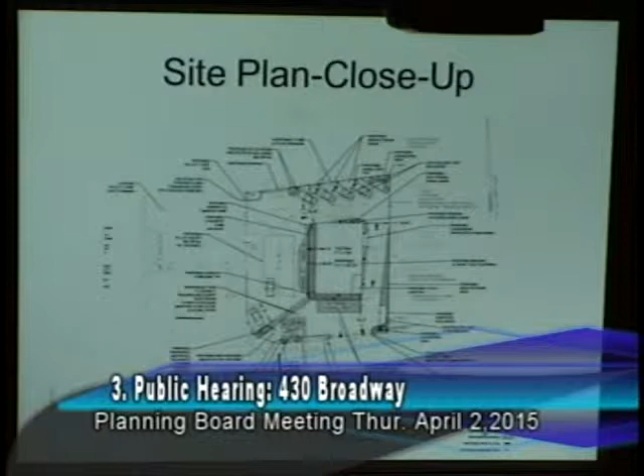The last comment that Mr. Barron had was about a possible raised crosswalk here. I think one other alternative, because I don't know if the applicant can do a raised crosswalk there, would be some sort of stamped concrete as opposed to just striping. The problem with striping is that if it's not maintained... I think that's something that should at least be looked at. I'll ask the applicant to please look into that. That's something that would be very favorably looked upon if there's some way to really identify the sidewalk areas.

Okay, any other questions, comments? If not, the applicant? I didn't see your hand, I'm sorry. You just did it. Oh, I don't have any guilt then, okay.

I would just like to note that Judith Spikes, 5 Brace Terrace - the concerns of cyclists, pedestrians, children, school children going to school, and bus have already been noted. I'd just like to add one other perspective, that of a person patronizing Walgreens, the diner, or the Mobil station. I patronize the diner and Walgreens, and I used to patronize the station before that corner got all crowded up after Walgreens went in. I've also heard, I believe at a board meeting recently, that Phelps Hospital has leased the 2nd story of Walgreens for doctors' offices for a group practice there. I was wondering already where people are going to park - the doctor, the staff, and the patients - because already now, at peak usage times, existing parking is often almost used up.

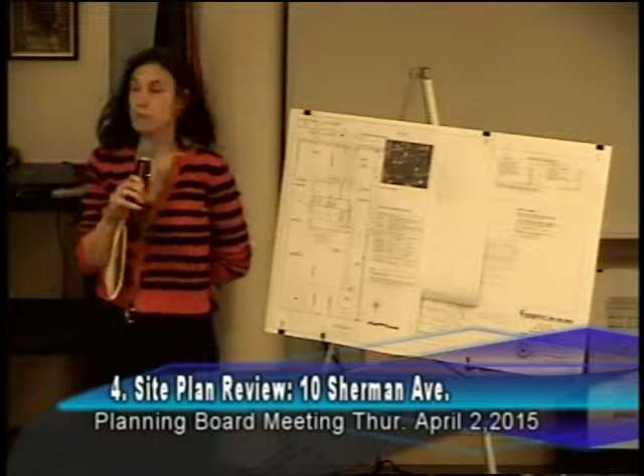Our clients, the Winiarskis, had purchased the property at 16 Sherman Avenue, which we had renovated for them and which they are currently living in. When the property next door, 10 Sherman, went up for sale, they had concerns about what might happen with it. They saw it as an opportunity to protect the investment in their own house, but also make an investment in the community where they've chosen to remain, as they had relocated just around the corner from Seneca Street.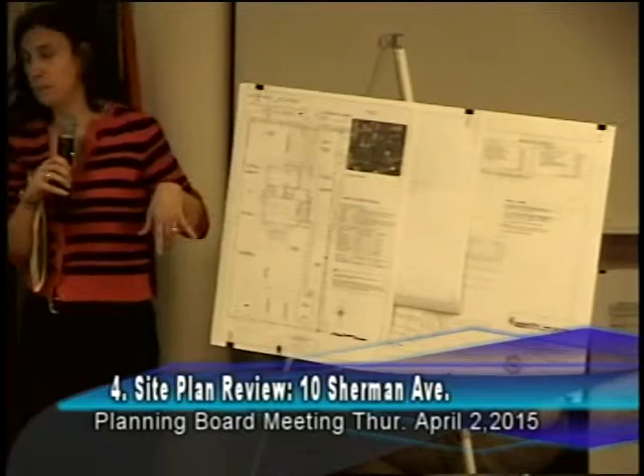So the proposal is to take the existing building down to foundation and rebuild new on the existing footprint. That's what they're estimating is the most economical approach, and it will sit on the existing foundation. We're not increasing the footprint of the existing structure.

You're going to use the same footprint? Ideally, yeah, the same footprint. Hopefully the foundations are adequate to support it. Well, we haven't taken the structure down yet. We're not suggesting that we're going to build a structure that cannot be supported on the foundation.

We don't work on prayer. We're not suggesting that we're going to build a structure that will not be supported on the existing foundation. Prayer is a good thing, though. But what I mean is that we're not going to be increasing the footprint of the existing structure.

If the existing foundation is deemed not adequate, we would pour a new foundation within the limits of the existing building. When they make statements such as 'the existing structure,' who tests to make sure that what we have as a foundation is adequate for the new building? An engineering report would be required to state that the foundation would be sufficient to support the proposed load the new structure would require. And that would be required by your department before you go forward? Yes. Okay, thank you.

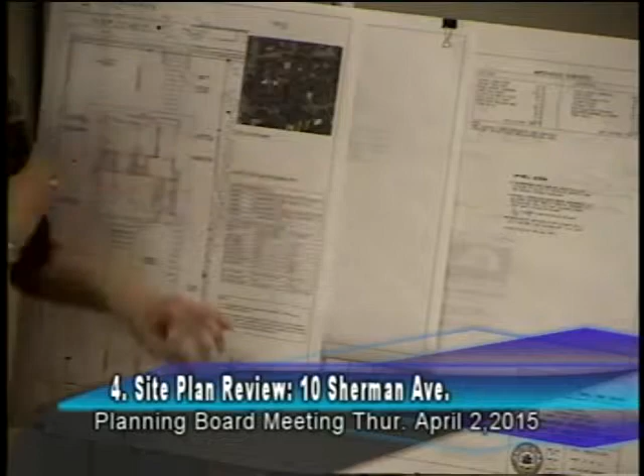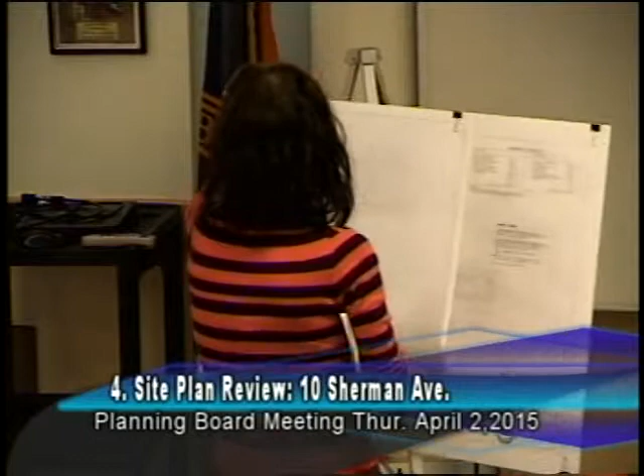So the description on the application for the building permit is a complete interior and exterior renovation. It's not a renovation, it's a reconstruction, from what you just told me. Well, there were discussions about maintaining the existing structure and working within the limits of that framework, and then subsequent discussions with the contractor suggested it might be more practical in economic terms.

To take it down, exactly. The building permit that came to your department says clearly interior, exterior renovation, and what we're hearing now is rebuilding from scratch. Yes, if they remove the building down to the foundation and reconstruct it, there's a new series of requirements, so that may not be an accurate description of what the proposal will be.

Okay, thank you, I'm just reading what it says here. No, I understood. Okay, so what's the proposed rear and side elevation in the new scheme?

Is that building total, is it different from the other one? Yeah, this is the proposed building. Okay, here's the old one. Gotcha, okay, I see it.

Is there anyone here excited about this one? You're interested in the whole story? Are you familiar with this? Totally, totally. So it wouldn't get you too excited if they demolish the existing house, it's an eyesore. You're in favor of it? I am, yes. That doesn't mean I would approve what they want to put up, but honestly it's a very awkward, characterless house. Okay, no, I'm just aside because you're not on the microphone, therefore even though you're talking it doesn't exist. Okay, no, I just wanted to make sure who was in the audience.

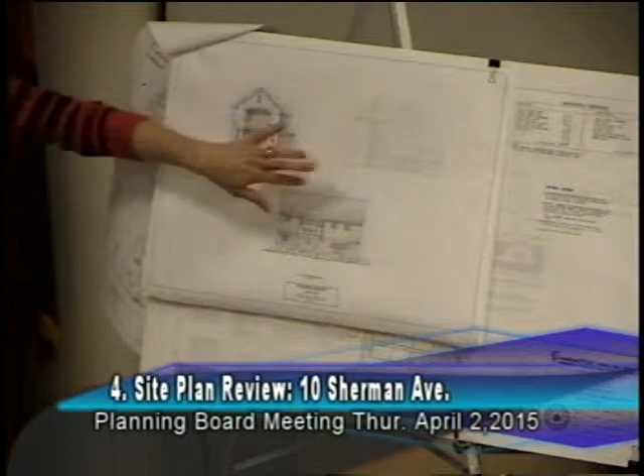Okay, understood. So this is the proposed rear elevation, proposed side elevation. This is 16 Sherman shown in context next to it, so you can get a sense of the scale. What the clients have enlisted us to do is really make it more in keeping with the character of the rest of the neighborhood, while still deferring to the scale and structure of the other houses around it.

Does this go in front of the architectural board? Yes. So you understand that we're talking about, since your foundations are not moving hopefully, your side yards, backyards, all of these have no changes from the original. The only thing changing is the structure itself. And what you're describing now is more into the architectural field, so you're gonna have the same dog and pony show in front of the architectural board. Yes, understood. Are you changing any driveways or anything?

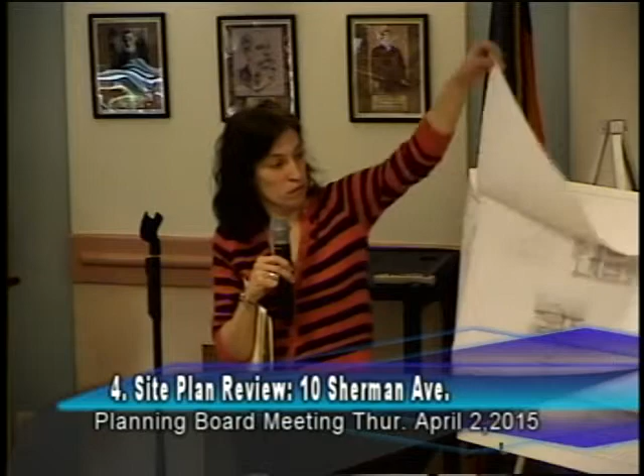There is an existing... let's get this back here. There's a current driveway in the front that goes to what is now the garage, which I mentioned is going to be redone and eliminated to be steps, with paving leading to the new front entrance. There is existing paving in back that was theoretically for a garage that might have existed, which is going to be eliminated. And then there is a curb cut in the back for a future one-story, single-car garage at the back of the property within all the required setbacks.

So the answer is there'll be changes to the driveway? Yes. I was just wondering, because if you're not changing the site, you could consider waiving it subject to all engineering requirements. That's what I'm thinking about.

Your drainage system, there is a storm sewer retention system? Yes, stormwater retention. We've enlisted the services of an engineer. It has to comply, and that has to go through the building department, so you're gonna be seeing all of that. We have already enlisted an engineer, we have it all done. Wonderful, and you have to set yourself up for a session with the Architectural Review Board. Yes, and at that point, I do agree.

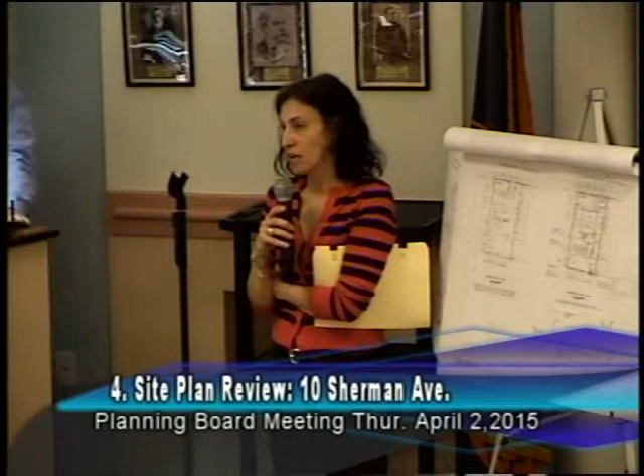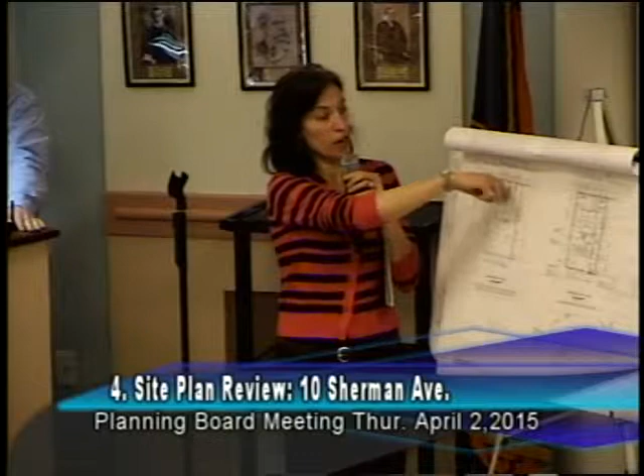I don't know if it's considered a paper street or not. It's an alley, and the various houses along Sherman and Belden have access and garages on that. Is that how the property is accessed now? No, not currently. Currently, there's a garage at the first floor level, off of Sherman.

So you plan on changing that? Yes. I mean, if what you say is right, you're not applying for the garage, you're actually losing one parking space, plus whatever length of driveway off-street parking. Yeah, and make sure you have access that way too. Are there easements going back there? No, not that I'm aware of.

Okay, I think we have a number of questions from staff. I see a problem, and that is you're going to build this new one-car garage structure, is that correct? Yes, I mean at some other point - we don't currently have drawings for that structure, so we would apply for that secondary structure. Then do you have spots for 2 cars on the property? Not on the property, based on this plan.

I don't have a real site plan either. There should be 2. You're not showing the new garage. I mean, the garage is not part of your application, even though I'm looking at it. But do we have, in either case, the one-car garage would not satisfy the requirement?

No, but then the one-car garage is too close to the street, so that you can't pull off the street and park in front of the garage. Understood, that would make 2 - the one inside, and the additional car parked in front. Which is very often in this village, you'll see many of those where the driveway extends 20 feet from the building line, from the property line, so you can park a car on the driveway.

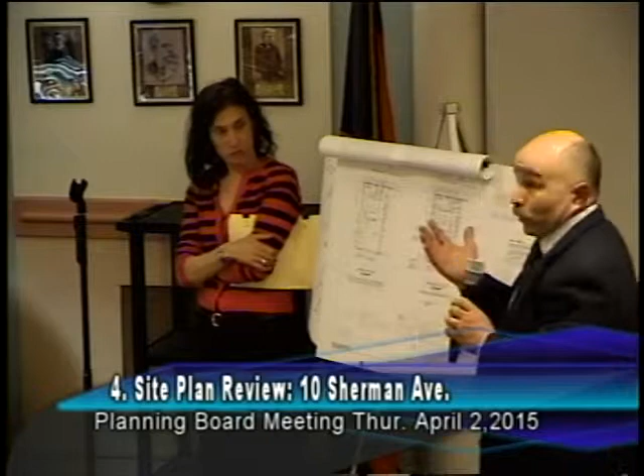Of course, the reduction they were trying to do is something a little bit more receptive to the neighborhood, eliminating the front driveway and making that a walkway, keeping the one off Sherman, eliminating the majority of the impervious surfaces along Shaw Lane.

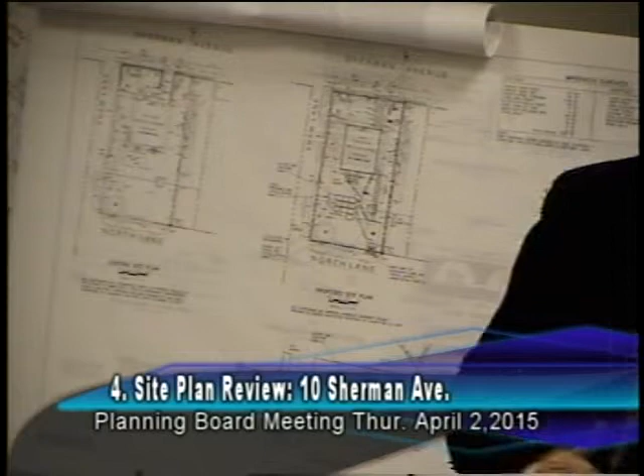And then introducing a new curb cut along North Lane. North Lane is a right-of-way, but it's a paper road, it's not paved, not an improved street, not a village road.

When you say paper road, it doesn't mean it's covered with paper, it means it's on the filed map of the village, but not an actual road. As you know, these were all discontinued years ago.

But in order to gain access to that road, you have frontage on it, you probably have access to it, but we've got to look at that. You'd have to improve it to village standards potentially, and we've got to ensure you can get fire access there to the driveway. There's a lot of things you need to look at, so I think you need to schedule a public hearing. This is more complicated because it'll end up with the fire department participating to make sure it's legal.

We're concerned about life safety. And if there's issues here, that's part of it, as well as the parking requirement.

That's a separate issue. So you have to look at it from the point of view that you're closing off the other two driveways. That's important aesthetically from your point of view. And now you're on a different street, not on a publicly paved street. So that is an issue.

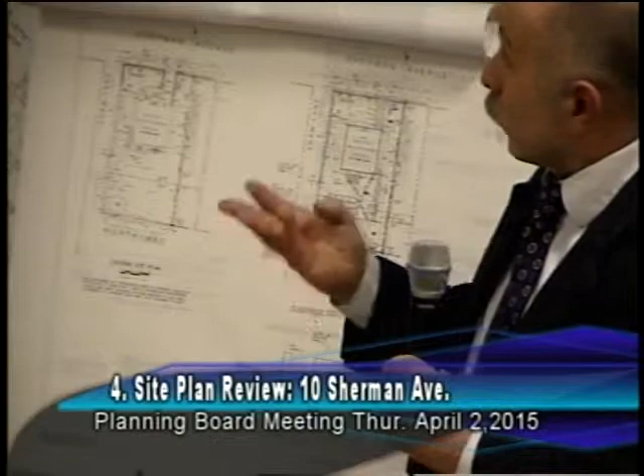Exactly, and then you eliminate the need for the fire department to pay for these reviews. That's something that Brian said is also a paper road.

Oh, it is a paper road? South Lane and Shore Lane, they're all... sorry about that. Well then, you just lost those big bucks. That was a good approach but I guess it didn't work. Good idea, worth a shot, wrong venue, sorry. But very good.

You have to take a look at this, please. Not a problem, so then it's whatever the requirements are for the road and adequate access on the north side of the property. It's about legal road status and how to make it into a legal road if you're going to be using the paper roads.

What are the requirements? I'm not going to give it to you now, you're going to get that from the building department. Just contact Brian, we can discuss all these issues before you, and he'll identify all of those.

What are you doing tomorrow morning, Brian? We'll close tomorrow. Oh darn it, tomorrow is Good Friday. Today is Bad Thursday. Understood, yes, very bad Thursday.

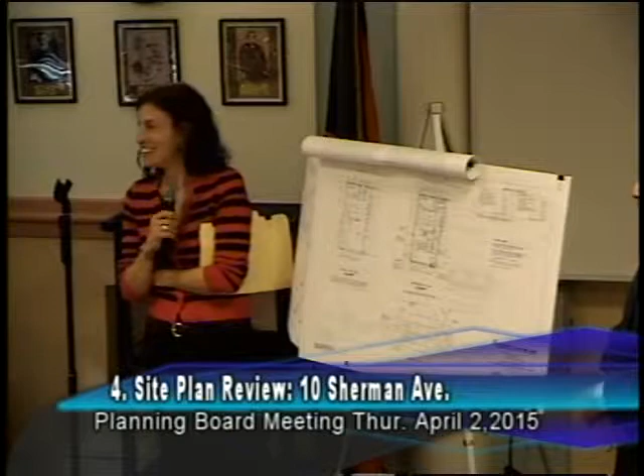Make an appointment with Brian when you can, we'll sit down together. Okay, we're set, you know what you have to do. We'll then call for another pre-submission at the next meeting so that you have all your ducks together.

Never mind. You, I would like to speak. Would you like to speak? I got the impression you'd like to speak.

My name is Margaret Markey. I live at 37 Belden Avenue, which is kind of catty-corner from the property we're discussing, and I live on the other side of North Lane. North Lane is a bit of a puzzle in the sense that I honestly don't know its status either, and I think it's really quite unclear.

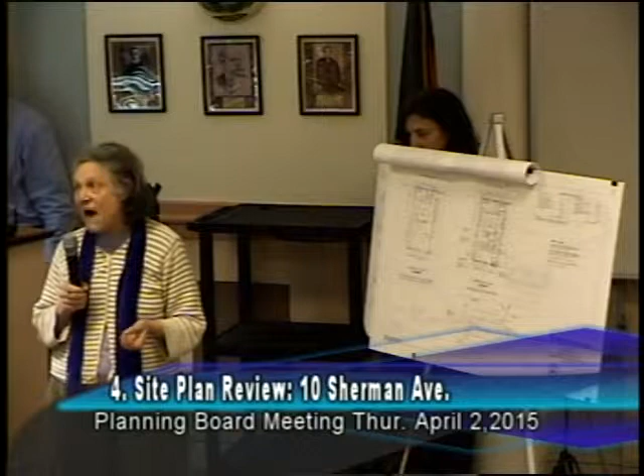But the Winiarskis, who restored what we all call the former Joyce James house, did a great job on the house, but unfortunately they put up stockade fencing along the whole back of their property and encroached onto North Lane in order to be able to turn into their three-car garage back there. I wish they hadn't done it because, as nice as the house is, the way North Lane looks now really took away a lot from the very rural character back there.

I don't know, it really changed it. So my plea is, please revisit that awful three-car garage and stockade fencing, because I know you were the architects for the renovation. Be more sensitive to the neighbors. This project was just awful from that perspective.

They'll come back at the next meeting with something better. And I understand the Winiarskis are buying or wish to buy the property next door to me, 29 Belden. I'm glad that they're restoring it, and I'm awfully glad to hear they're going to tear down 10, which is an eyesore, and I sure hope what you put up is nice, and I think it probably will be.

But the way the lane affects our property values a lot, and when that character is destroyed, it destroys our property values. And I don't know, as far as fire access is concerned, how a fire truck would ever get down there. Carefully, I mean... well, okay, thank you.

Anyone else? If not, then the next meeting will be a pre-submission. That's the first Thursday in May.

The next item on the agenda is the pre-submission conference site plan review. This is to reinstate an approval from a long time ago, for construction of a new house on the existing foundation at 31 Maple.